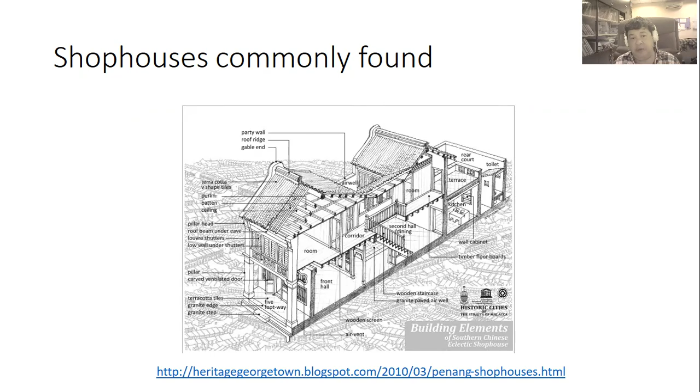The same as this. It's also built by craftsmen. So it's unself-conscious tradition. There is no architect's name to it; it's more craftsman built, or tradesmen.

So when we talk about vernacular architecture, you can refer to, in the 1800s, a writing by Gottfried Semper, a German, called The Four Elements of Architecture, and he identified the Trinidadian hut, Trinidad near the Caribbean. So this is a hut commonly found there. As you can see, there are similar materials or similar sort of patterns, but not really. But what he commonly found there is what he's looking for in terms of the proportion system of the house.

If you want to refer to the diagramming big idea methods of architecture composition by Swisher, he mentioned Gottfried Semper's focus on the hearth, the mound, the roof, and the partition. The hearth is where the fire is built, right in the middle. The mound is when it's elevated; the vernacular building is elevated on a mound. And then we talk about the roof. We have to have the roof for shelter, and the partition.

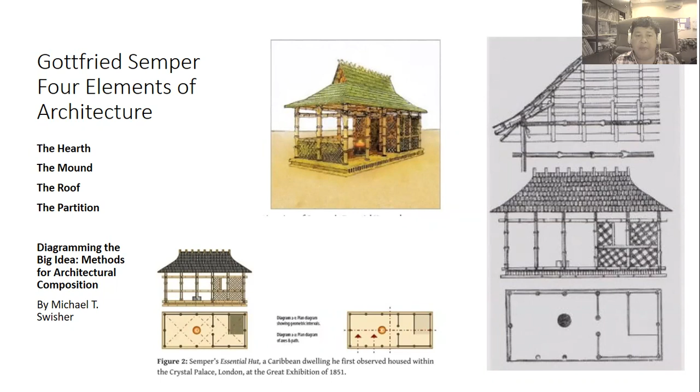And these are the basic ideas of vernacular architecture which Semper underlined. And what he argued was that in any architecture exploration, you have these basic criteria. Is it so in the Malay house? I refer a lot to Lim Jee Yuan's book, Rediscovering Malaysia's Indigenous Shelter System.

We don't have the mound, but the level where the people are living or sleeping is raised. So in a way we have a mound. And where is the hearth? The hearth should be where food is prepared at the back. And then we have partitions, of course, screens that separate the different rooms. And then we have the roof. So it's typical of vernacular architecture to have those elements throughout the whole world. But we differ from the Trinidadian hut.

The diagram here shows some common activities in the Malay house. Traditionally, spaces in the Malay house are multifunctional. The use of space changes at different times of the day and year. And there are minimal partitions or interior walls in the house, allowing for the flexible use of space and for good ventilation and lighting of the interiors. Minimal furniture is used, and most activities are done on the floor.

You sit on the floor, you do sometimes have a bed, or later they will have sofas, settees and all that, but the traditional way is to sit on the floor on a woven mat and do a lot of activities on the floor. However, look at this diagram on the right. You have the anjung, which is like a veranda or a porch or an entrance balcony in front, and then you have serambi gantung, which is the secondary space before you go to the main space, which is called the rumah ibu.

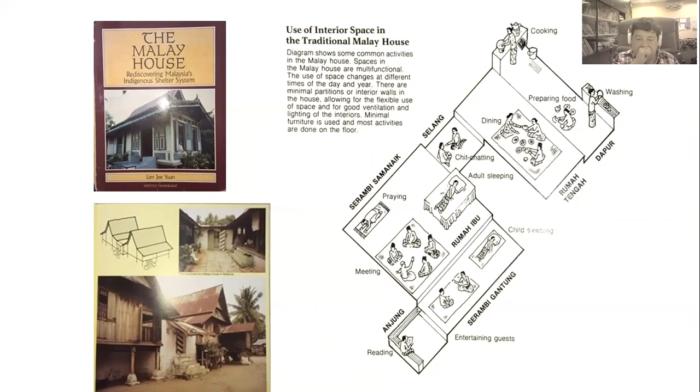After the rumah ibu, going towards the rumah tengah, which is the dining area where usually the family would just eat; if there are visitors, they'll bring the food over to the rumah ibu. And none of the visitors will go to the rumah tengah, which is next to the kitchen. So this is a typical diagram for most of the houses.

Interesting to note the patterns of how it started with the rumah ibu, the main house, and then added serambi gantung on the right side. And then you have other additions, like the selang or the crossover that links to other spaces, like the rumah tengah. You can see the development of these spaces as time goes on, like a modular system, but by craftsmen and non-architects.

They've already got the template. They know how to do that, how to add to the houses. And this lasts for years and years when maintained. So on the left are the different designs based on different regions in the Malay Peninsula.

We focus on the Malay Peninsula at this instance because of the references that I have. But in Thailand, in other Southeast Asian countries in particular, with similar characteristics, you can find similar traditional vernacular houses that are made of timber. When you saw the Trinidadian house as well, it's also made of timber or made of the local materials. They could use clay or stuff like that as well as timber, but often the roof is made out

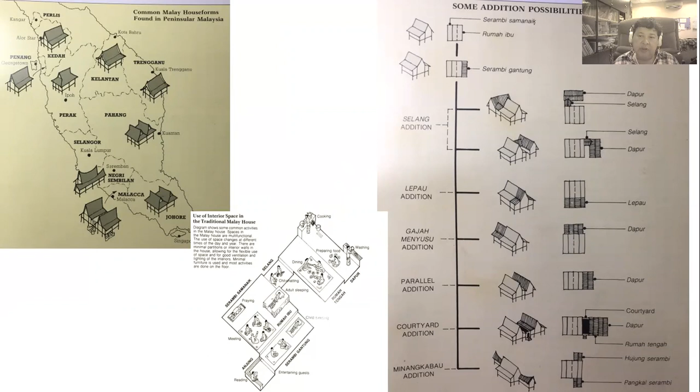of indigenous materials. So I'm going to go quickly into the others and show the climatic design of the Malay houses. Now you can see that the selang or the Serambi Gantung on the right hand side and the main house, there's cross ventilation possible because it's from the floor to the ceiling or almost to the ceiling, where you can open and let in fresh air and cross ventilation. So these are the principles.

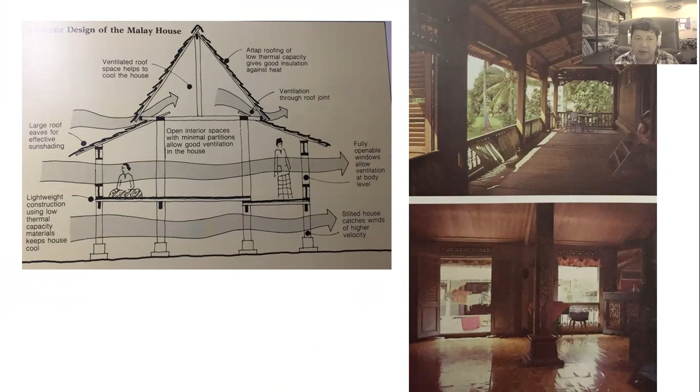Lightweight construction using low thermal capacity materials keeps the house cool. Stilted house catches winds of higher velocity. Open interior spaces with minimal partitions allow good ventilation in the house. Large roof eaves for effective sun shading. Fully openable windows allow ventilation at body level.

And even the roof has its system to ventilate the roof so that the heat that you gain from the roof does not dissipate into the interior space. So there is ventilation through roof joints. And the attap roofing of low thermal capacity gives good insulation against heat. Ventilated roof space helps to cool the house. As you can see, the design is very practical, functional, and with purpose at all parts of it, the joints, every single material, construction, and space.

More examples of the Serambi Gantung are found on the left, and the Rumah Ibu, the diagram below, and other parts like the courtyard. The introduction of the courtyard in certain places in the Malay Peninsula allows people to come through the selang to the courtyard, and then the houses are separated by the courtyard. So this is the introduction of the courtyard from China to the Malay Peninsula in particular. You can see that found in certain places like in Malacca.

At the bottom, in the middle, on the left, another example of a house of an antique dealer in Tengkera, Malacca. So when you see this courtyard area, you can see the house, the other house, and the place where people will sit near the entrance to the courtyard, as in this picture on the right. So it makes for the usefulness and the sense of privacy, hierarchy of spaces that is being used in terms of the formal use, the less formal use, informal use.

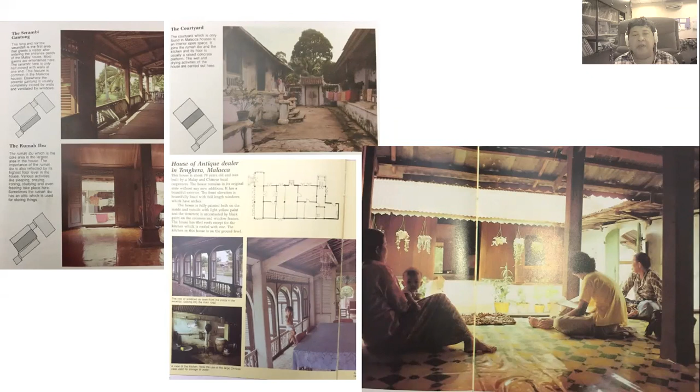What activity is it that they're going to do? Is it family eating together? Is it doing a commercial activity, like maybe making something to sell or cooking, or there is a festival coming up, so you can accommodate more people to assist and it spills over to the courtyard. So these spaces are very multifunctional and very flexible. There are some more examples here of Malaccan houses and the complexities of the house type that developed over time,

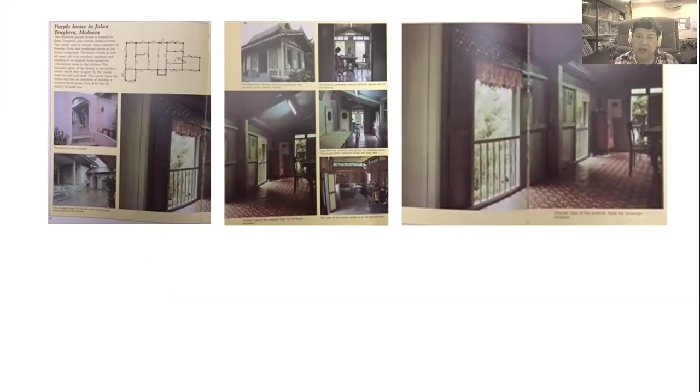illustrated in this book. Now we look at the ornamentation, and clearly in the Muslim household, less ornamentation on figures and more on floral patterns, using the local material, wood in particular, and influences of traditions before, and also a very contextual way of looking at it. The patterns represent what is available, what is inspired from the landscape or the natural surroundings in this region.

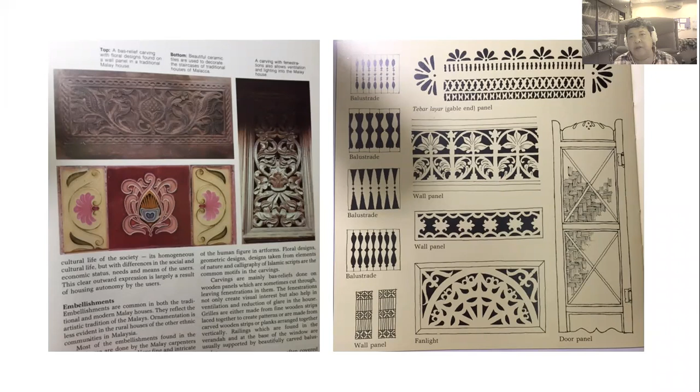So whatever it is, it could be a screen, it could be balustrading, it could be a door, it could be a window. So these are some of the traditional crafts using timber. The use of timber is shown throughout, right up to the roof construction from the base. Usually the base is, they start to use steel, for example, steel rods.

The base is usually concrete, some form of stone or some form of mixed-in concrete or use of such materials so that termites don't get into them. But they always have a layer, a metal layer, so that termites don't go into the house.

So these are all in Malay, you know, the beam, and tiang is column, tupai is like a bracket, and then rasuk pendek is like a beam. So these are the names for it, and rafters. Perabung is a ridge.

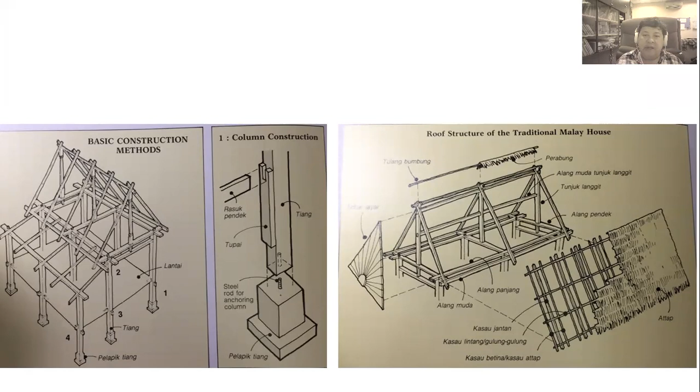Tunjuk langit is the post that goes up vertically. And they have specific names, like the rafters are kasau and beams are the alang. And you have the tebar layar at the side, which is actually a decorative sunrise pattern at the side on top of the roof, which also allows ventilation to come in.

Again, the diagram, and it's worth your while to look at these principles, cross ventilation, for example. Okay, sorry, this is the comparison between a modern house on the right and the traditional house. When it comes to cross ventilation, the elongated open plans of the traditional Malay house allow easy passage of air and good cross ventilation.

You have windows at both sides. There are minimal interior partitions in the Malay house which restrict air movement in the house. But if you were to look at terrace houses, there are partitions inside, and you can't have proper cross ventilation, for example.

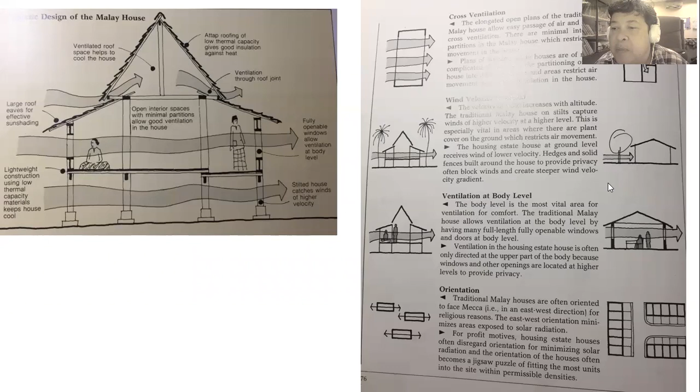And the wind velocity: when it's on stilts, wind velocity increases with altitude, so it's much cooler when it's on stilts. When you're lower, it's not so cool. Ventilation at body level: the openings are at the entire body level, and the part of the body that needs to be cooled is basically the upper body. So the argument is in terrace houses, when you're sitting down, you can't get proper ventilation.

And orientation. It just happens that traditional Malay houses are often oriented to face Mecca in an east-west direction for religious reasons, and the east-west orientation minimizes areas exposed to solar radiation, yeah? Because the bigger areas exposed are the north and the south, which are not directly affected by the sun beating down on them. So for the housing estate houses, they disregard orientation.

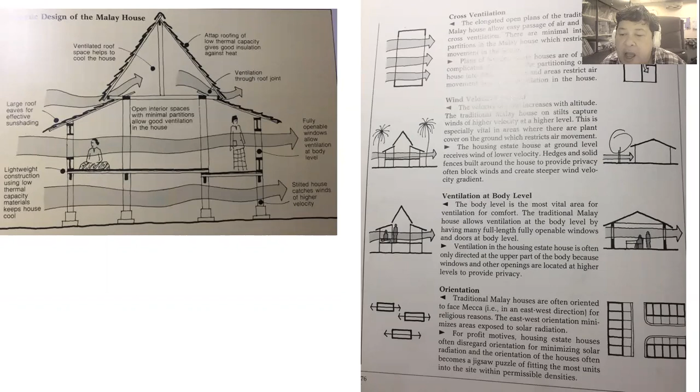So that's why when you deal with designs, traditional architecture and vernacular architecture, you can get a lot of practical tips on how to orientate, how to make openings, the use of material. And you can innovate using screens made of concrete and bricks, which is quite fancy nowadays, or a trend. But in retrospect, you need to look at the principles of these traditional timber houses, because they give a lot of ideas on how to design in a tropical climate.

The building materials. Traditional Malay houses use lightweight construction of wood and other natural materials. The lightweight construction of low thermal capacity holds little heat and cools adequately at night. The atap is a roof made out of leaves from the palm fronds and is an excellent thermal insulator. Glazed areas are seldom found in traditional Malay houses.

But the modern housing estate houses use bricks, tiles, concrete, and other materials of high thermal capacity. These materials store up heat and re-radiate it into the house, causing considerable discomfort. So even at night, when there is no sun, because of the re-radiation you can still feel hot in the house. And also in terrace houses, glazed areas are usually abundant. The layout, the ventilation of the roof spaces, and the vegetation also influence how cool the house would be. The overhangs and exposed vertical areas, the glare, and the lighting level.

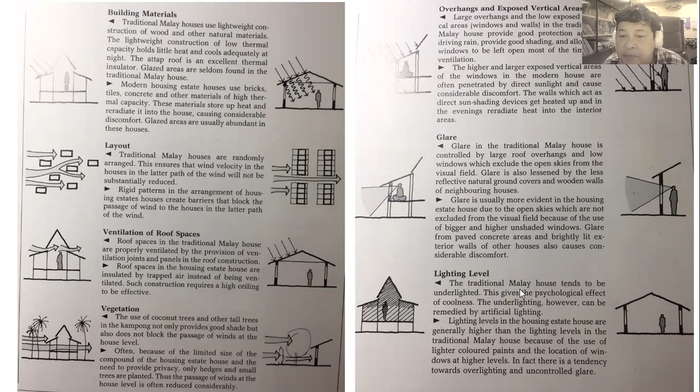One thing about traditional vernacular architecture: when we talk about vernacular architecture, this is a form and a design that has been a template for the artisans to work on. Whenever you have a house, they design it like this, and it's a practical design, and often it's found in rural areas. If it's found in the cities, usually it is made of brick, because like I said earlier, I showed you the shop houses and the compound houses. Yeah, because in cities they are more regulated, but in rural areas there's more freedom to place whatever thing.

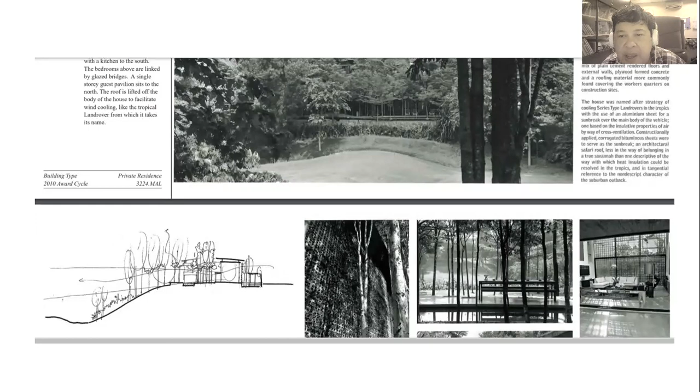But the innovation that this house posed, published in this link, is that there is a golf course next to it. So the architect actually borrowed the view, and you can see on the bottom right, next to the interior shot, taken from inside the courtyard, looking out to the golf course. Using vertical elements of the trees at the courtyard, it is as if there is an infinite view from the house, taking in the view of the golf course.

The use of vegetation and where to place the ventilation blocks is based on the orientation of the sun, which part of the wall will have more of the sun, so you cool down that wall with vegetation, and vegetation will grow on that part of the wall, for example. So a sketch by the architect on the left, and more sketches on the left.

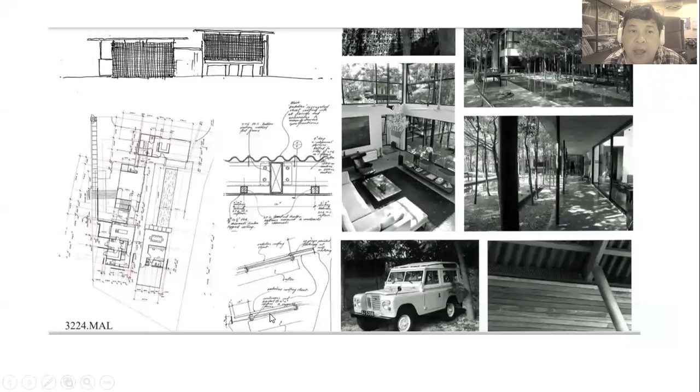And the Safari Roof House was inspired by the Land Rover, the four-wheel drive, which has a safari roof. So the safari roof tries to ventilate the roof, which also shelters the house, so that the roof is not hot and the rest of the house is not hot either. So the use of volume to make sure that it's comfortable for the occupants is also used in this instance.

So there you go with the last photograph, the last reference, examples and precedents of traditional vernacular architecture shown by architects of recent time found in Malaysia. And there are many other architects, these are not the only ones, obviously, and how they interpret vernacular architecture into modern architecture. There are still people using pitched roofs for their design. It's not a problem, or angled roofs.

So when you use a roof angle, how useful is that angle? In this case, it's a 60 degree angle. And then the lower one is about 30 degrees, so that the rain can easily be dissipated. If you use a very shallow or gradual angle, the rain will need a longer time to be disposed of.

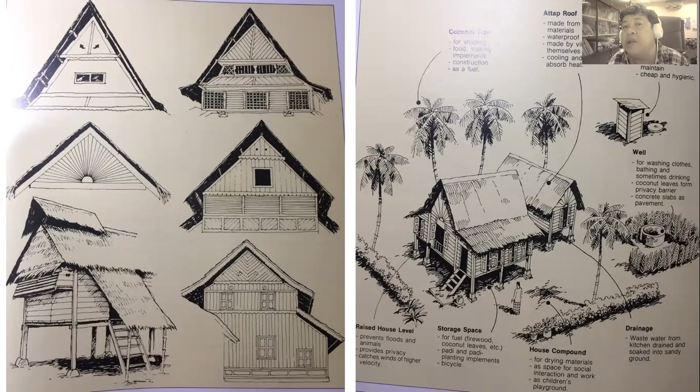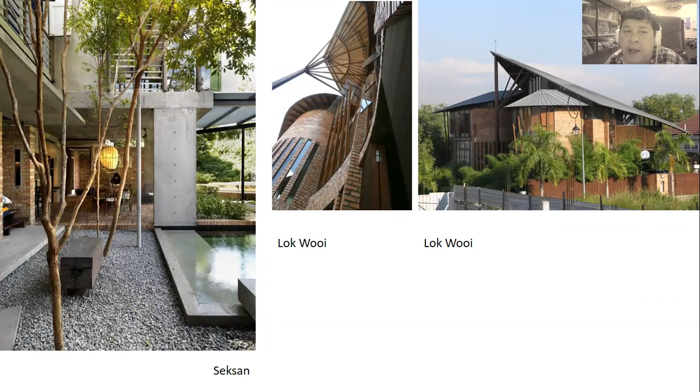So some of these practicalities have been utilized by these other architects, like Lok Wooi in the angles that he used, and the eaves that let the rainwater out, which are overhang eaves, not just short but long. And the Safari House also uses a lot of eaves, but the angle of it is minimum.

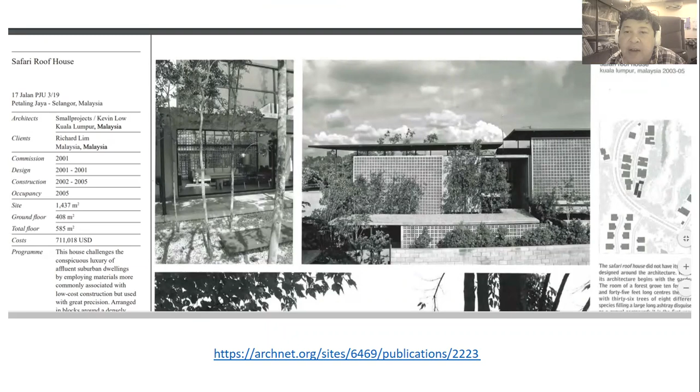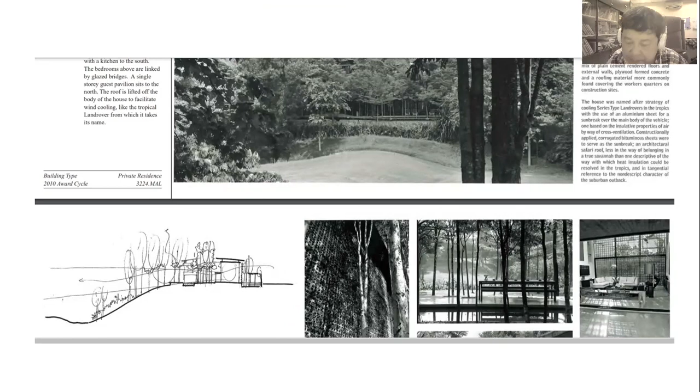It doesn't quite have an inclination, but it's a minimum inclination. Let's see, yeah, it's a very minimum inclination of maybe 5 to 10 degrees. So that's the trendy one nowadays. So that is all for now on vernacular architecture, both traditional and modern.